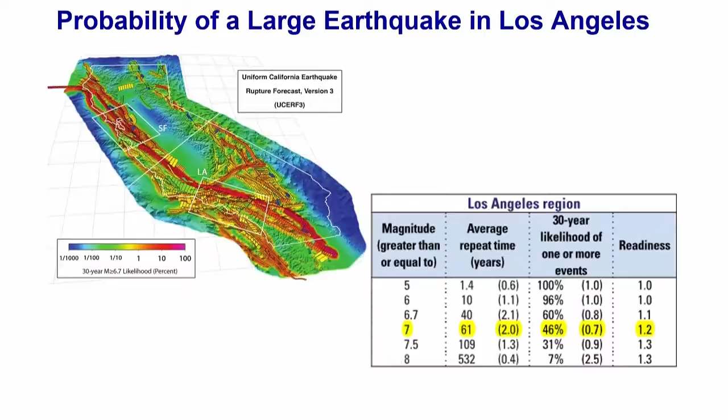You have faults nearby, like the Newport-Inglewood fault near Torrance. If a magnitude 7 earthquake occurs there, where we're standing will receive very heavy shaking. If a magnitude 7 occurs somewhere like Ridgecrest or the San Andreas fault, Torrance may not be as affected. So it's important when talking about magnitude to also talk about the distance from the fault and which fault you're referring to. But the earthquakes are coming—there's no doubt about that.

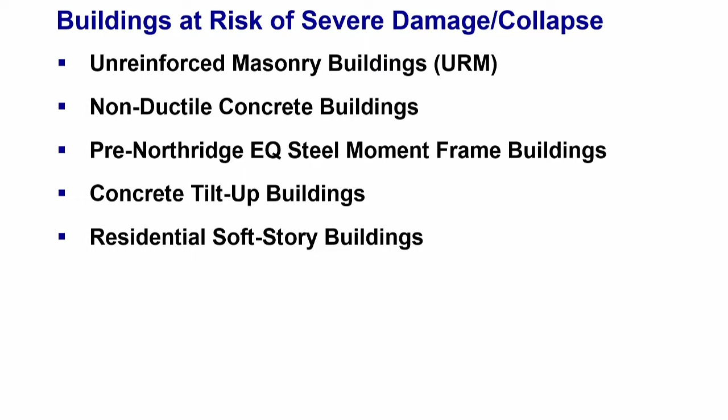The buildings usually most at risk of severe damage and collapse are: unreinforced masonry buildings, non-ductile concrete buildings, pre-Northridge steel moment frame buildings, tilt-up buildings, and soft story buildings. I'll get into the details of each now.

First, the unreinforced masonry buildings. These are probably the most prone to damage and collapse, but fortunately a lot of strides have been made in protecting these buildings.

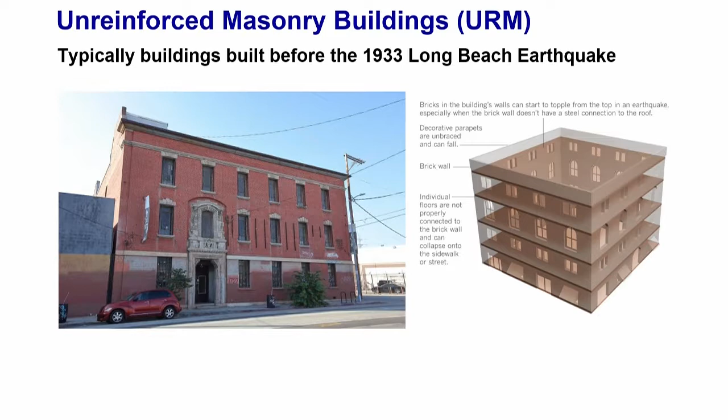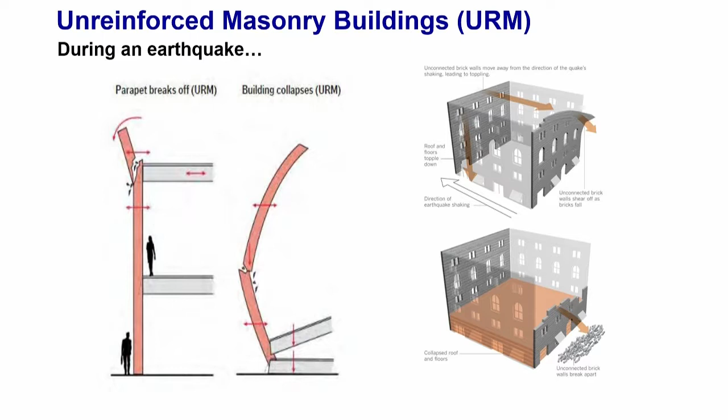Unreinforced masonry is just what it sounds like—unreinforced brick, similar to what you see here. It could be single story or multi-story. The issues with unreinforced masonry are: first, the parapet may collapse and fall from the building. Then, when an earthquake comes, the brick walls' ability to handle seismic forces is compromised since there's usually very little connection between the floors, creating a risk of floors collapsing and walls crumbling to the ground.

Here are some examples. People really started learning about this during the Long Beach earthquake in 1933—this was a school building before, and this was it after. This is another building from the Long Beach earthquake, and even as recently as 2003 in Paso Robles. If you were around during the Whittier earthquake, there were a lot of unreinforced masonry buildings damaged then.

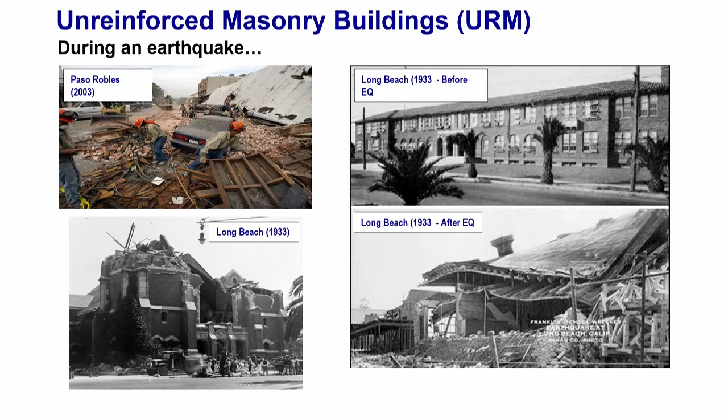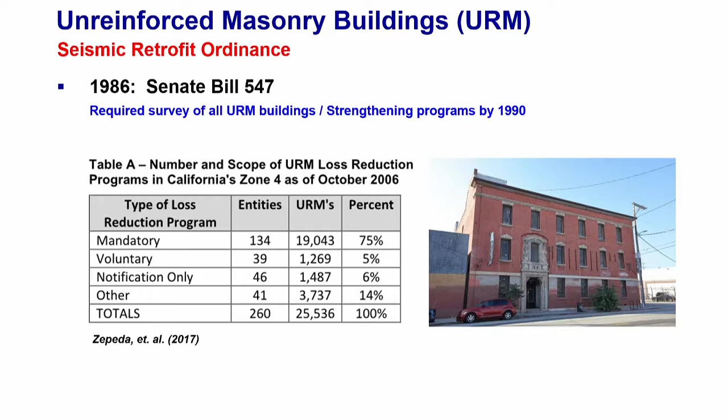In 1986, a Senate bill came about requiring a survey of all the buildings, and for jurisdictions to start putting programs into place to retrofit them. That wasn't necessarily mandated or enforced—it was all about the jurisdictions and how well they could enforce it. But for those that did put mandatory programs into place, those buildings have pretty much all been retrofitted and are safe, representing about 75% of all the building stock in California.

Not to say there aren't unreinforced masonry buildings out there—I know of a few that haven't been retrofitted, so they do exist, but a great majority have been retrofitted already. I won't get into a lot of details, but they're typically retrofitted by adding bracing at the parapet, strengthening the connections between the floors and walls—you've all seen brick buildings with the little square plates and a bolt on the outside.

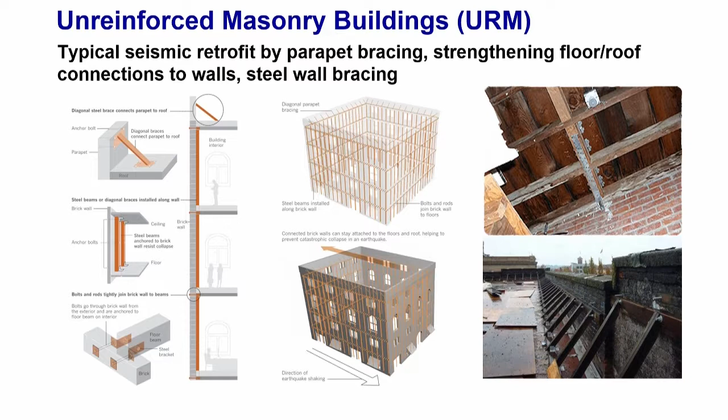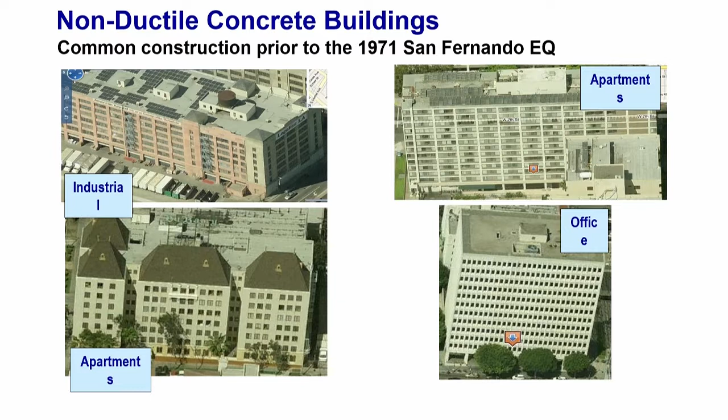Non-ductile concrete buildings - this is a very prominent topic being talked about now, especially in the city of LA and a few other cities. Non-ductile concrete buildings are just that: buildings built before 1971 that have little ductility. Ductility is the ability to flex, bend, and move with the earthquake.

These are just some examples of buildings in LA. They don't all have to be big buildings like what I'm showing here. They could be one-story buildings, two-story buildings.

Where we learn most is from the 1971 San Fernando earthquake. This is the Olive View Hospital, and this hospital had to be demolished after the earthquake. This taught structural engineers a lot about seismic design, so 1971 is kind of a key turning point for seismic design.

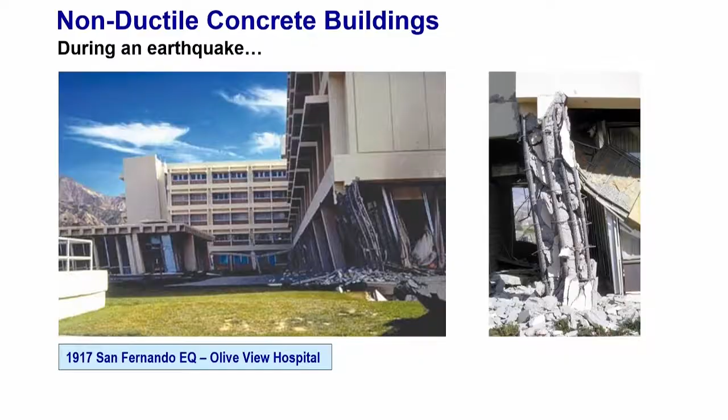You can see this column here, the issue being the lack of reinforcement. You see these horizontal bars - they're just like small wires. They weren't really able to hold the column together. In current seismic design, we place lots of these very closely spaced to help the building survive.

We even had problems in the Northridge earthquake. This is a building in Santa Monica. These diagonal shear cracks in the columns really jeopardize the ability of that column to support the loads of the building. This was a building out in the San Fernando Valley.

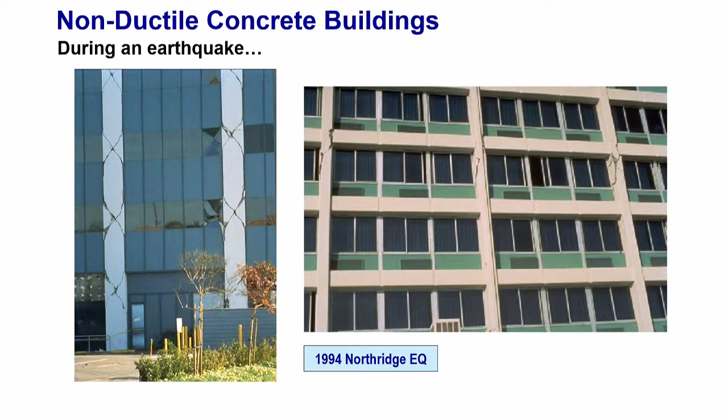So there's all sorts of different types of damages and issues with non-ductile concrete buildings. The city of LA has an ordinance from 2015. They were kind of at the forefront of this. This shows you the kind of timeline.

Basically, they start by sending out checklists. We've been involved with helping many clients with that, and that's the easy part - just identifying whether it is a non-ductile concrete building or not. The next part is the hard part, which is actually putting plans into place to retrofit the building.

And it's all about economics - about how much money and how much it's going to take to do this work. So they give 10 years to get a retrofit permit in place and 25 years to actually complete the construction. There's some nuances with code changing and stuff like that - it's not as straightforward as it looks.

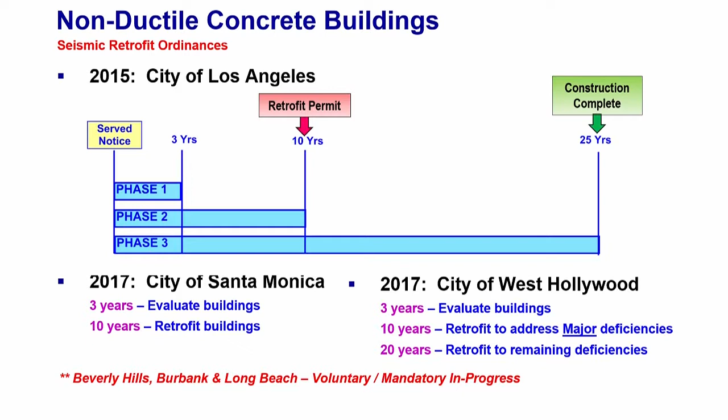Santa Monica did a similar ordinance in 2017, and West Hollywood too, but with shorter timeframes. Santa Monica gives 10 years to finish it. West Hollywood gives 10 years to address major seismic deficiencies, then 20 years after that. Other municipalities like Beverly Hills, Burbank, and Long Beach are in the process, either having voluntary ordinances or working on a mandatory ordinance.

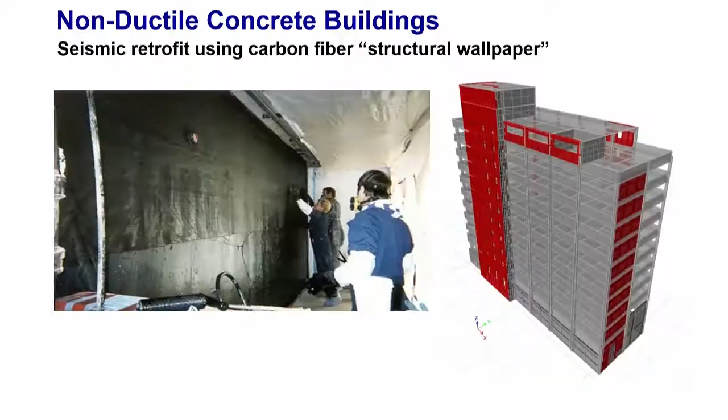There are lots of different ways to retrofit these buildings - we could spend a lot of time on this. We use something called structural wallpaper, basically carbon fiber, like fiberglass but using carbon instead of glass, to strengthen walls and columns. You can wrap it around the column to protect it, like those columns we saw at the Olive View Hospital. We can also put a braced frame on the outside to stiffen up and strengthen the structure.

This is a building near the airport you might have seen - this is the braced frame added to the outside of the building to help minimize disruption to the inside, and then they put a cover on it. Beautiful looking building right on Century.

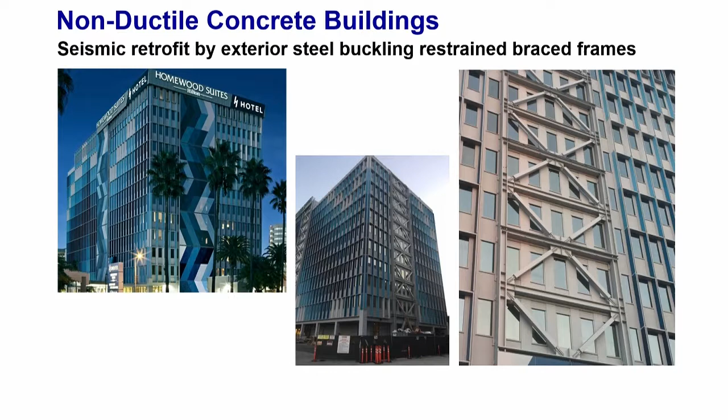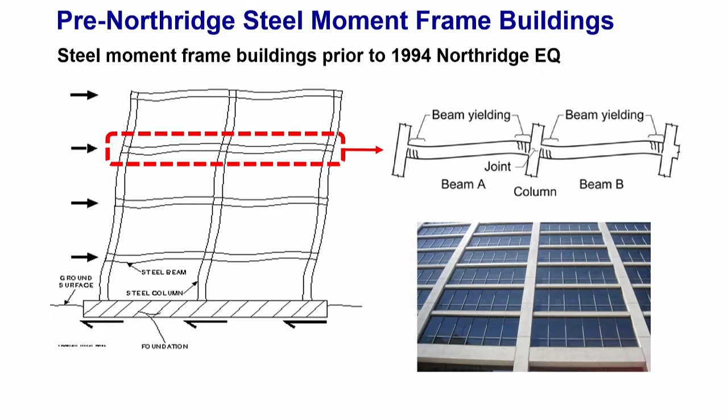I'm going fast, but I need to cover a few more things - the pre-Northridge steel moment frame buildings. A moment frame building is basically a series of beams and columns. In a moment frame, you're looking for those beams and columns to flex and be ductile, similar to what we saw with the concrete buildings with the lack of reinforcement.

With the steel buildings, it had a different issue. Typically, the beam is welded to the column, and these welds were an eye-opener for the entire structural engineering community during the Northridge earthquake.

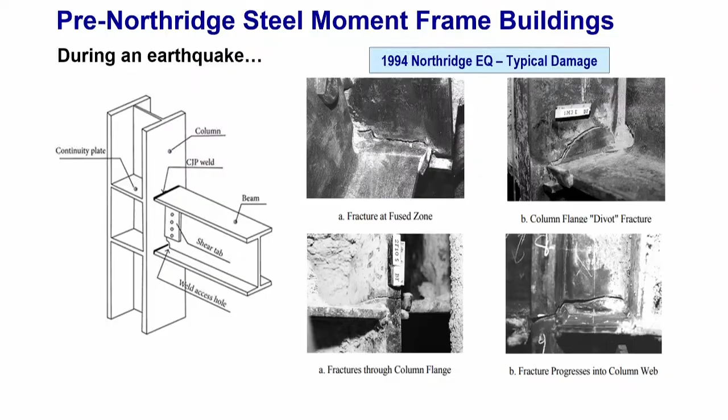People started looking into buildings, scraping off the fireproofing, and realized all of these fractures went into the columns from the beams, all originating at those welds. So a very large research program was undertaken.

That's what I did my research in, and came up with lots of new ways of doing that in new construction. But if you're pre-1994, you're very likely to have this problem in your building.

Right after the earthquake in '95, the city of LA had basically an ordinance for limited types of buildings and took care of those issues. But since then, really nothing has happened until recently.

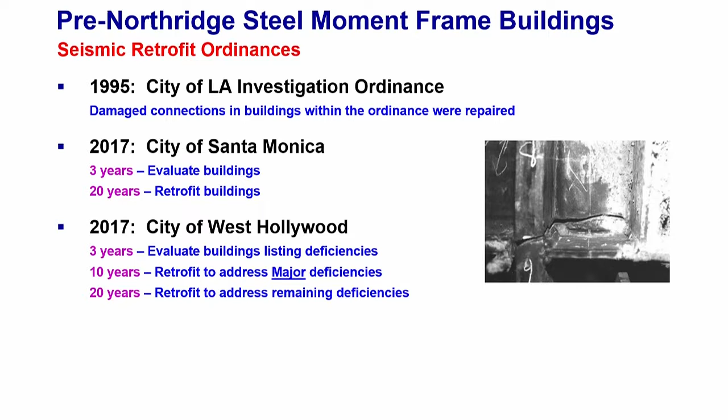Santa Monica and West Hollywood have put into place ordinances to address those issues. They're addressed in lots of different ways. Some you go in and strengthen the connection. One way is putting a little haunch at the bottom, lots of different ways. Another way is to basically take the moment frame out of play and supplement it with a braced frame, kind of similar to that building I showed near LAX.

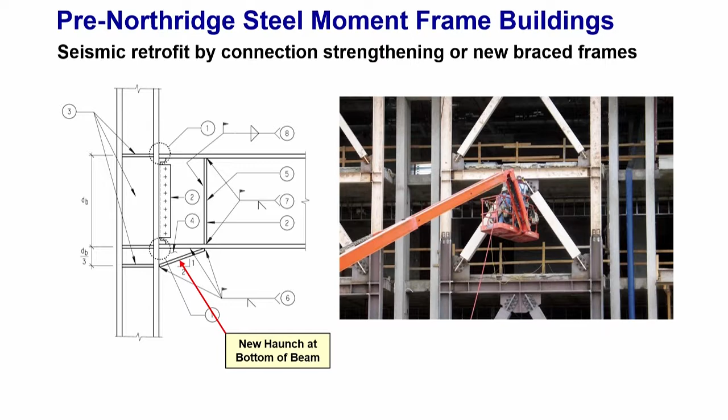Another way, this is a project we did in San Francisco where we added a braced frame to help these lower levels, using what we call viscous dampers. They're basically shock absorbers—you can see that's the finished condition. These are actually like big shock absorbers you have on your car, to help dissipate the energy from the earthquake.

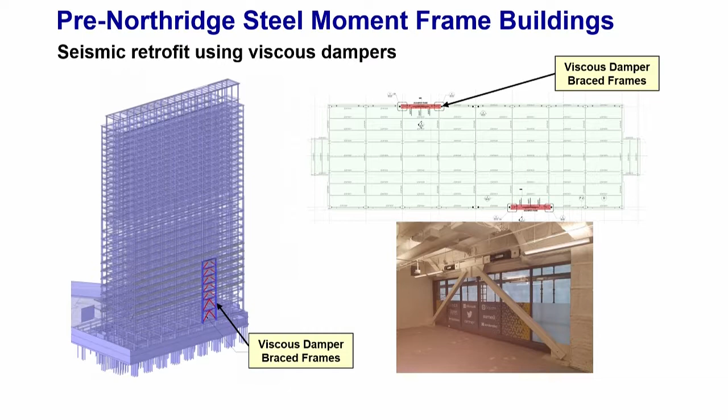Tilt-up buildings. There's a lot of these in Southern California, a lot of warehouses. We usually think of them as this, but sometimes they're looking a lot nicer, not like such industrial warehouses. They could be in office parks and business parks all throughout Southern California. If you don't know, tilt-up is basically a concrete wall building, but they're cast on the ground and lifted up into place. You've probably seen them in construction, driving around, seeing things like this.

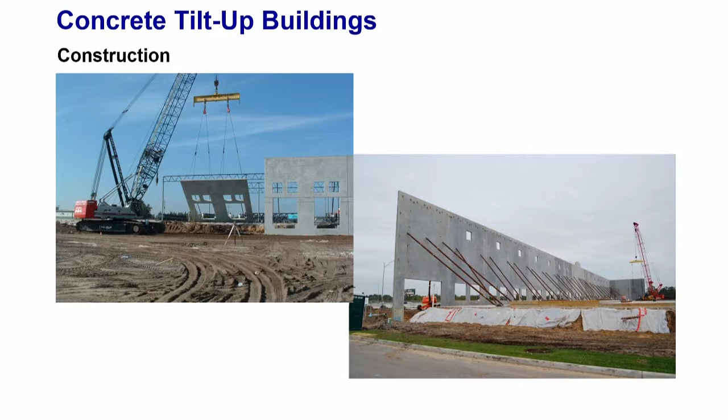The problem, especially after the Northridge earthquake, showed us that, again kind of like the unreinforced masonry, the connection of the roof to those walls is very critical. And we learned a lot from that earthquake about what level of force we should be designing those connections for. So there were cases of building walls collapsing and the roof partially collapsing because of that. We go back—this is just one small example—you basically go in and add anchors that tie the roof structure or the floor structure better into the walls.

But there's no seismic retrofit ordinances in place for these buildings. Generally, if you're after the Northridge earthquake, after 1994, these buildings are probably in much better condition. Pre-1994, that's where those issues will be.

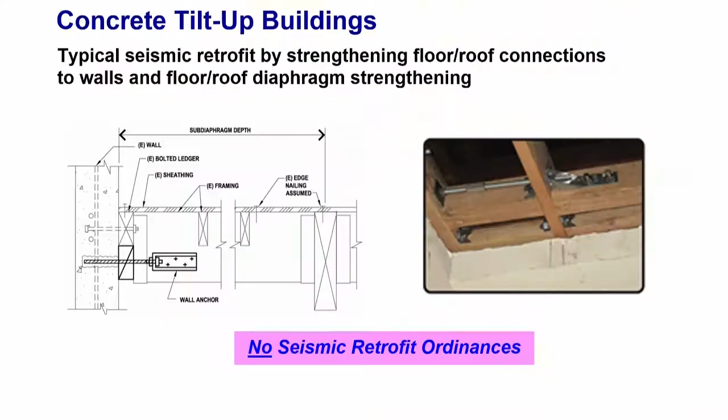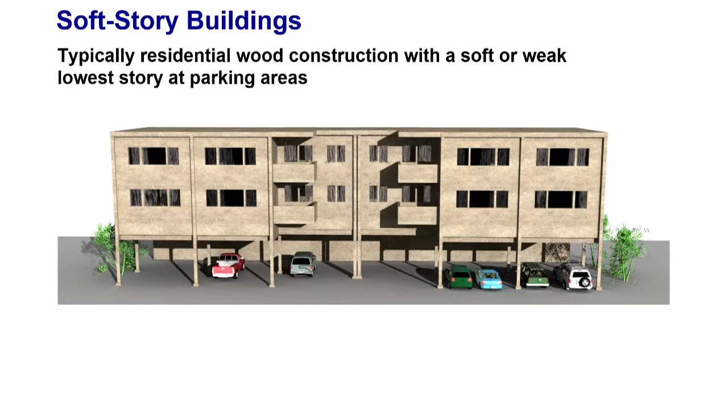Lastly, soft story buildings—I think Ali's going to talk a little bit more about this. We have these buildings very prevalent throughout Southern California. When we say soft story, there are again lots of nuances to this, but primarily it's where you have the parking at the ground floor below an apartment building, and you can see all these walls that all of a sudden disappear or set back, and that creates what we call a soft story. And what happens in the earthquake, that soft story has a potential to collapse.

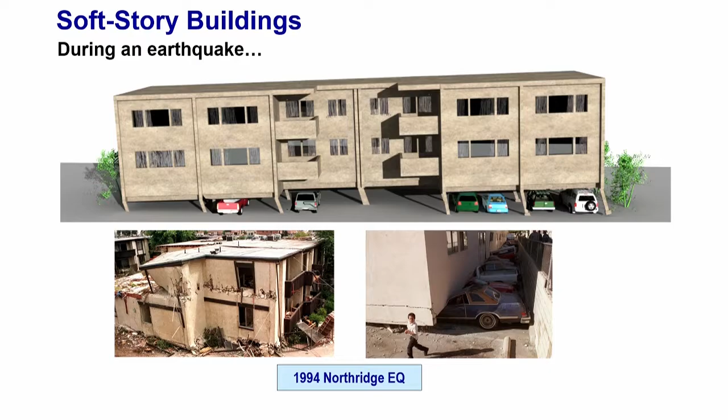These are some photos from the Northridge earthquake. I'm sure you've all seen this before. Very devastating. So that actually has the most ordinances and has gained the most traction, not only because it's dangerous and very devastating, but also because it's relatively economical to take care of.

City of LA has an ordinance from 2015, shorter duration, because they realized that the exposure, the risk to life is even much higher because this is where people live. Retrofit plans in place in 2 years, construction complete in 7 years.

Santa Monica and West Hollywood have mandatory ordinances, a little bit shorter durations, kind of similar to the non-ductile concrete. And then other cities, including Torrance, have either voluntary or working on mandatory ordinances related to this.

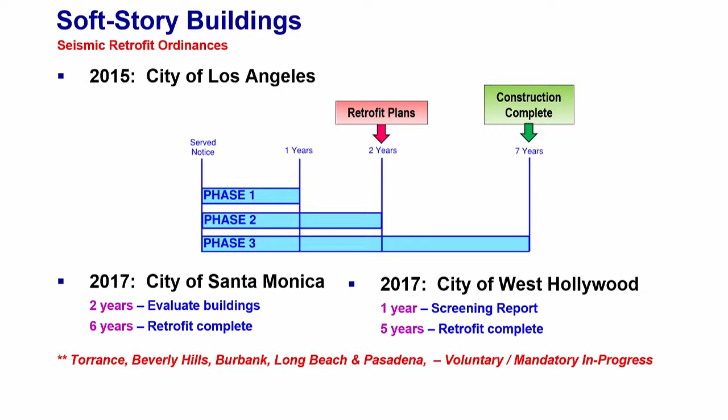This is an example of a type of retrofit. It can use moment frames, shear walls, braced frames. This is a common example where you basically put a steel moment frame around the parking spaces.

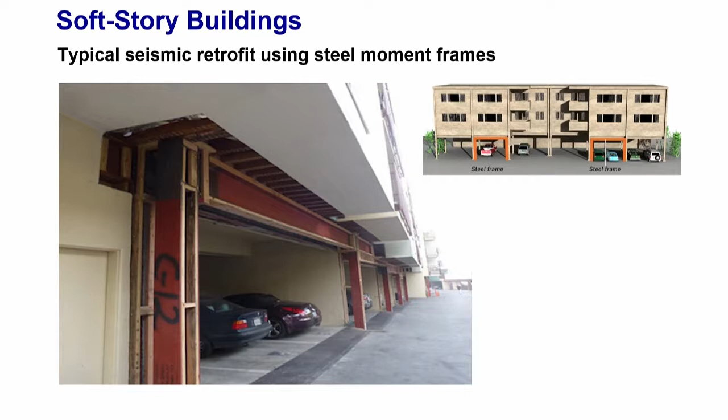There's nothing nice and nothing fun and nothing cheap about retrofits, but this is fairly straightforward to do. Last thing I wanted to leave all of you with...

Whereas that little more increment to say, let's make the building comply with the current code, or even better than that, the gain you're getting is marginal. You've already protected life in the building, you've done a lot to keep it from collapsing, but that marginal increase in seismic performance generates a lot of cost. So by just addressing a few focused things in your buildings, you can actually gain a lot of benefit. I think that's all I have.

Thank you for your time.

I think maybe we have time for one or two questions if there's anybody in the room. Yes. When you inspect the building, can you tell what level of earthquake it will respond to, and also once you fix it, what will it respond to?